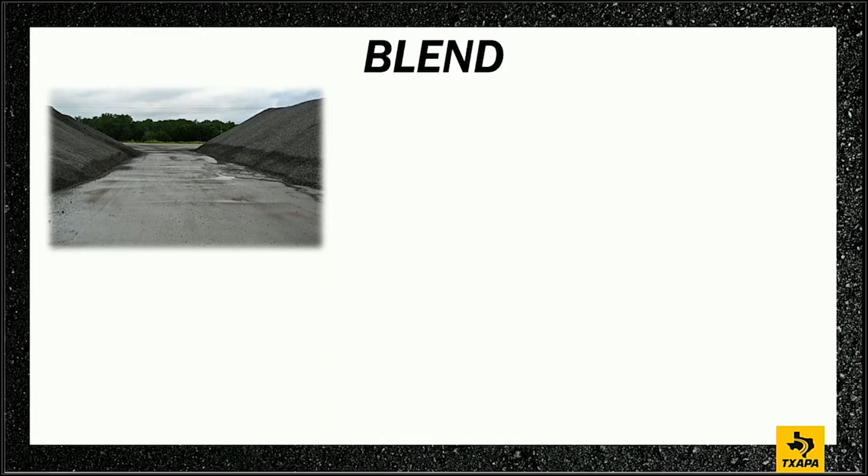So it's super important. When you walk out to the back of an asphalt plant, if our stockpiles are not separated, then we know we have an issue, right? Yeah. We know that we can't control that stockpile. Here we have cold feeds, and I think we have 7 cold feeds here. And again, each one of these materials is going to go into that cold feed, and they're going to go into that cold feed with a loader.

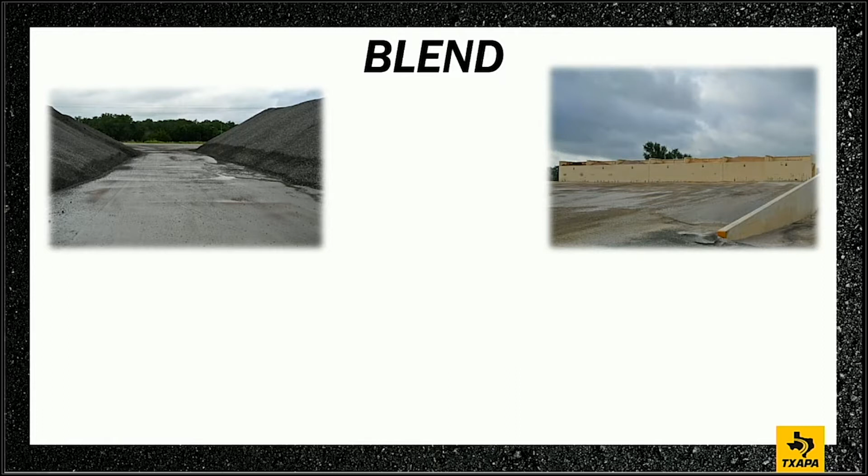So what's the most important part of the asphalt plant? The loader. Because why? The thing I want everybody to look at here is that this happens to be a very, very good loader operator. There's no material spillage in the front of the storage bins or behind them. And he hasn't stacked up the material so far in between the bins where it would commingle and roll off from one side to the other.

If you notice, those bins have bin separators at the top. Those are not to overfill the bins. That's not bin capacity increasers. Those are separators, to keep the material separate. I was real impressed with this loader operator.

I can spend 10 minutes at an asphalt plant and tell you whether or not you're going to have a gradation problem just by watching the loader operator. Yeah, how they cut into the pile, how they work the face, where they pull into the pile. It determines what kind of moisture content we're getting and the consistency. We talk about consistency a lot. We need to mention it at least 38 times, because everything we do in the front end of the asphalt plant is going to create consistency as the material leaves the plant in the truck on a job site.

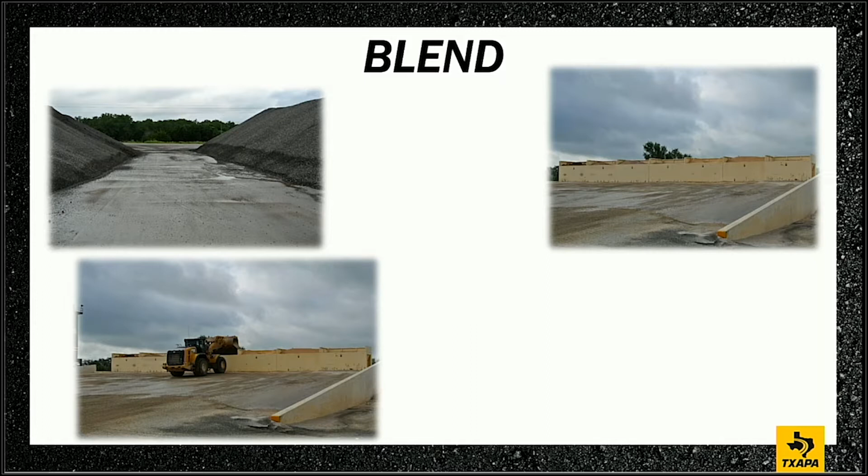So if that loader operator is loading from the backside, the front side, the side of the stockpiles, we know that it's not going to be consistent. We know that we're not going to have consistent moisture. Look at the moisture lines in those stockpiles. It's very visually evident. And with all the rain we got here yesterday, I imagine that line's probably a little bit higher than it is out there right now.

And if it's not on paved stockpile areas, not only do you have moisture, but you're going to have mud, debris, other things. And if that bucket gets down too low and starts picking up some of those wet fines, they can end up going through the plant almost like an aggregate. We were actually looking at a project this week, and we saw some pop outs, and I'm pretty convinced it was due to clay balls and just digging too low.

So the paved stockpiles are nice. It shows good separation. Generally, when those stockpiles are made, they're also sloped. Yep, they're sloped so we can give that water some place to go away from the stockpiles and then drain out. Absolutely.

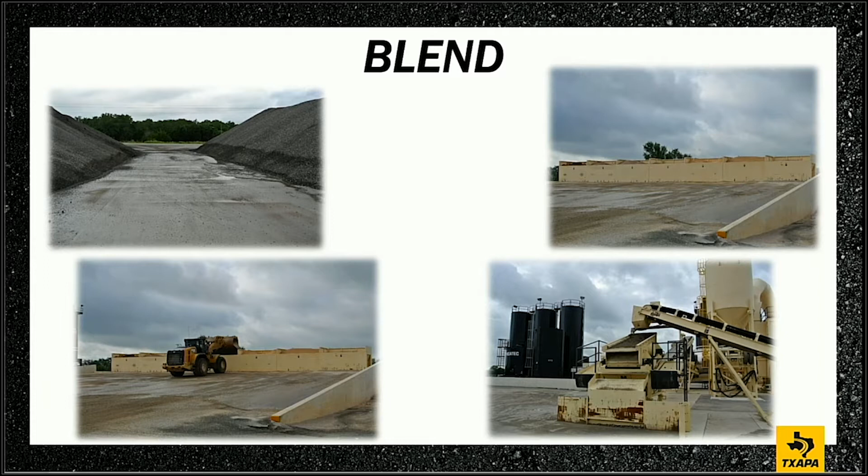Yep. So other aspects of blending. What else do we have? What else can we blend here? We got 2 more bins. We got other products we can bring in. Recycled asphalt pavement, RAP. Yeah, RAP. Or RAS. And RAS. Yep. So that's the reason we have 2 separate bins, and these bins got to be separate because again, they're going to be introduced separately into the mix. Right, and generally they're even shaped different because that material has different flow characteristics. So they're in a different location of the plant.

Well, we also have fractionated RAP. So could that be two different RAP? Could be 2 different sizes of RAP. Give me the lowdown on why do we fractionate RAP? Yeah, so fractionating the RAP is so important. We got to control our stockpile gradations, right? That's the main thing, and that's the whole reason why we have uniform stockpiles. When we look at our RAP stockpiles, we should treat it just like a virgin material. We should treat it as our most expensive virgin material that's out there. Right. Because it is. That's it.

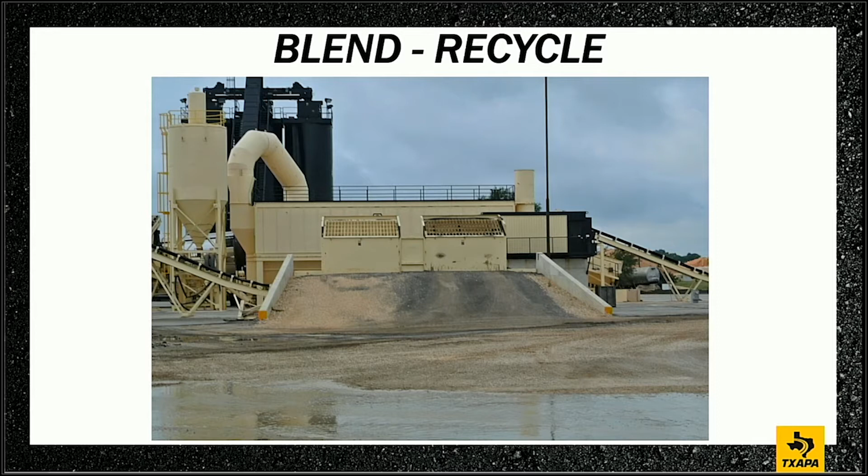You did wear your vest, didn't you? I did, absolutely, right, and hard hat and safety boots.

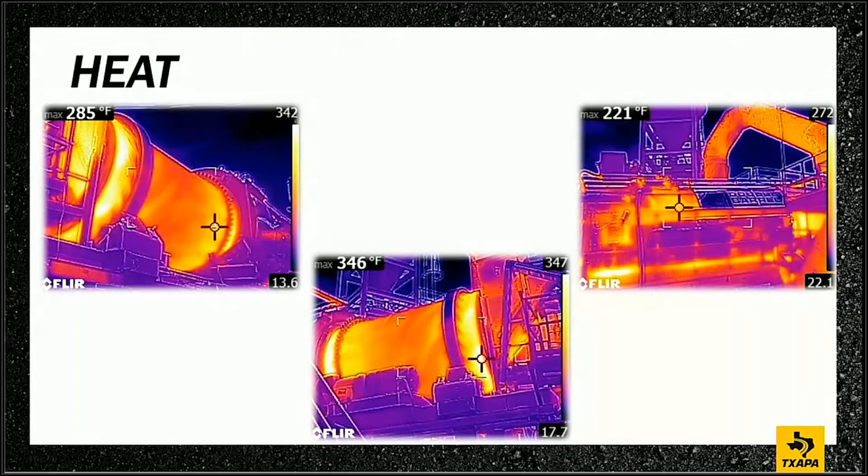All right, awesome. Yeah. But that drum is doing several things. One, it's blending, mixing all those aggregates together. It's drying the aggregate, drying that virgin material. And then it's going to heat it up. And those are actually your two different operations through the process. So we've got to dry that material before we can heat it up. And we talk about consistency, and this is one of those areas that's absolutely critical to understand. Plants are designed or rated around a certain moisture removal content, and when that changes, we need to adjust the plant.

And if they run a moisture content on the aggregate, they can adjust the plant as it's running. But it's been raining here in Buda for a couple of days, and I imagine it's not an average of 5% anymore. No. In these stockpiles. And kind of just a key thing here is that moisture content of the aggregate going into the drum has to be known, because that's how the plant is run. They assume whatever moisture content is, and that is taken out, and we're assuming dry material coming out the back end, and that's what we use to place our asphalt content or binder in.

And if we have our moisture content off, guess what? The binder content's going to be off as well. So absolutely. The only other thing here is that higher moisture content, lower production rate. Again, we just talked about it. It's been raining for 2 days here. Everything's wet. We're going to try to get crews going tomorrow; they haven't worked for 2 days.

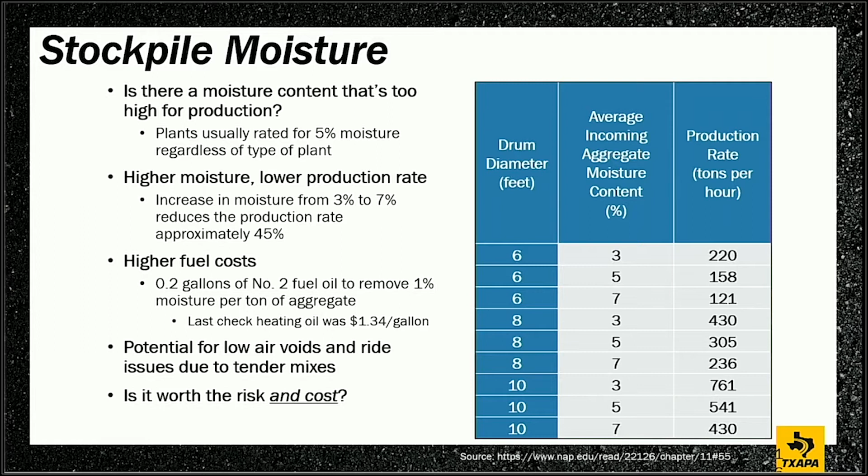Tomorrow they're going to want to go, and there'll be a tendency. Everybody's stacked up. They want to push the plant, but you can't push the plant because you still got to dry the rock. Yep. And so it's actually inverse. So if you try to push the plant too much, we may end up with moisture, and that's not a good thing. And when you have moisture in the mix, and I told Jim this earlier, my guys out in the field would yell, "The mix is tender, the mix is crawling. I can't compact it. We're having trouble."

Right. And most of the time, it has to do with the moisture in the aggregate. We're not getting all the moisture out. We have a tender mix. We can't compact it. So what do we do when we have a tender mix? We try to compact it more. We beat on it some more. And so you're just going to tear it up. And the more you beat on it, the guy says, "Well, let's put a pneumatic roller on. We can knead it up and heal it up."

But guess what we have now? We have a chatter in our mat. Yeah, the ride is not going to ride very well. And I could tell you right now, I could drive across some pavement and feel that chatter, and I know that they had a moisture problem. They didn't get all the moisture out of it. They're fighting air voids. They're fighting density. They're beating on the mat.

And that last line there: is it really worth the risk and the cost to run tomorrow? I know everybody's got to meet a schedule, but realize that you're not going to run 400 tons an hour. Again, for every 3 to 7% moisture, we're reducing our production rate by 45%. I remember talking to one of our members probably a month or so ago, because I wanted to go out to a project. He goes, "Well, I'm not sure if we're going to run or not. Rain last night, and we're going to make the decision this morning whether we run or not."

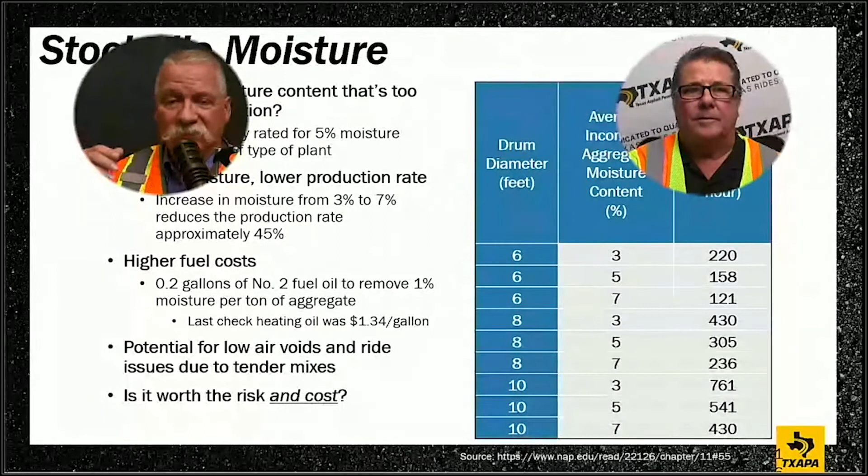I was like, "Really?" He said, "Yeah, we're going to check our moistures, and if the moisture's too high, we're not going to run." I was like, well, good on you. Good on you. Understanding the risk, understanding the cost, making a good decision. So good deal. Absolutely.

So what about additives? That was the next one on our deal. Yeah. We have dry additives here. And if you look on the left, there's a lime silo or mineral silo on the far left-hand side, and it's augering into another section that's bringing in the dry additive from the baghouse. And that baghouse is originally designed to be a big vacuum cleaner to clean out any dust that's going through the process that's caught up in the airstream.

But we reintroduce that material. We can bring that material back into the plant and use it. It's valuable material. Oh, yeah. Most of it's dust or very fine fines. A lot of people think dust is minus 200, but baghouse fines are maybe that and a little bit bigger than that, depending on how the plant's set up and how much air they're pulling through the plant.

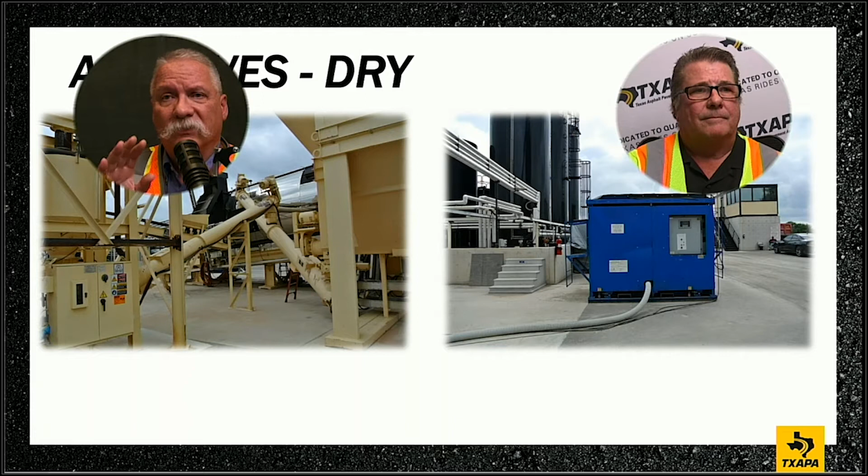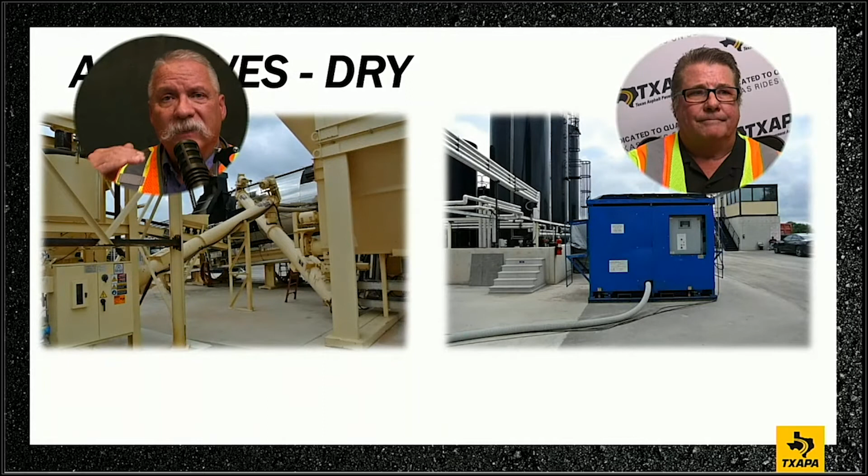But that material, we think, is about a third of the total dust content. Yeah. But if your dust content varies just a little bit, it can make a big change on your volumetrics. So getting that stuff metered back through properly. We talk about plant operation, about again running the consistency. That plant ought to be running consistent. If it's running consistently, it's going to generate a consistent volume of material.

Also type of fines. Yep. And so then when we put that material back into the plant, we're going to have a really good chance of getting a really good mix out of the operation. We had 7 cold feeds originally, and then we had two RAP or recycle feeds. So 9. And where's our 10th one at, Jim? Then we got the mineral filler silo and the baghouse. Now it's 10 and 11. So we got a pile of inputs here.

Yeah. So everybody's got to remember, this is again basic. You got to remember that the baghouse is actually feeding the material into it. I mean, it's actually one of your feeds. Yep. And we have to be aware of that. So when we start having issues with fines, or we're starting to have issues with AC, and we start having this fluctuation, go to the basics. Make sure that we're metering in correctly what we're supposed to be metering in, and that we have consistency.

Right. What else will we have with the baghouse when it's really, really wet outside? We might get caking happening on the baghouse. We might not be getting all the fines back into the asphalt plant. Yep, if we're pushing too hard. Yep. On the right-hand side, we have a fiber machine. This is another input that we have. 12. Yeah. So if you think about this now, fibers, we're not done yet. Yeah, we're not done yet. So that's quite a few moving parts.

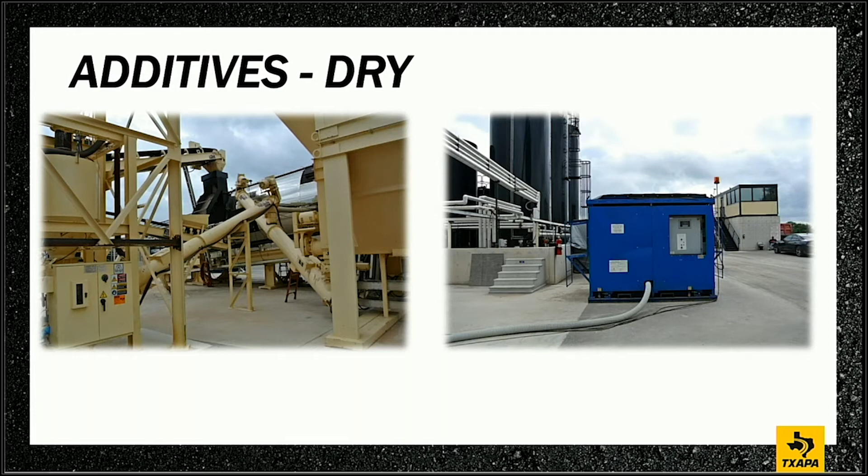But again, if you go back to the basics, your loader operator's doing the basic thing right, and we're metering in right, and we're looking at things right, we're gonna have a good material. But the fibers are not in all mixes. No, SMAs, PFCs, thin bonded. Yep. And what they do is they help hold additional binder into the mix to help make the mix last longer. We're not using it for any strength parameters. It's basically just trying to hold a thicker film of asphalt around the aggregate and in the mixture itself.

So a valuable tool. I like fibers. A lot of people don't like them. They can be a pain if they get wet and that kind of stuff, but they certainly do a good job. Yeah. So now we have liquid additives. Okay. So we had our dry additives. 12. Now we're okay. Keep going. So a lot of people are using chemical warm mix. We got a chemical warm mix as a liquid additive, and again, that's got to be metered in correctly.

Right. And then on the right-hand side, what are those 3 big old tanks we have there, Jim? Those are our liquid asphalt storage tanks. Yeah. So that's an additive, guys. That's an additive, and a lot of the times we don't pay enough attention to all the things going into the asphalt plant or going into the asphalt. And the liquid additives, the AC is very, very important.

We got to maintain our consistent temperature in those tanks. We need to maintain consistent temperature through our whole system, so that we get the right viscosity, we get the right flow, and then our metering system is correct. All that's got to go hand in hand. And even though it's number 13, that is our lucky number, because we really need to rely on that binder. And those vertical tanks actually have an impeller or a propeller in there to actually help mix and turn that material and keep it moving.

And they're heated, and each one would hold a different product, unless the contractor's running a lot of material and he needs to double up on a plant. So we want to make sure we're using the right material. We didn't show it in this because we just don't have time today, but generally, we're going to be pulling liquid samples during production to test and make sure that they meet all the properties. Absolutely.

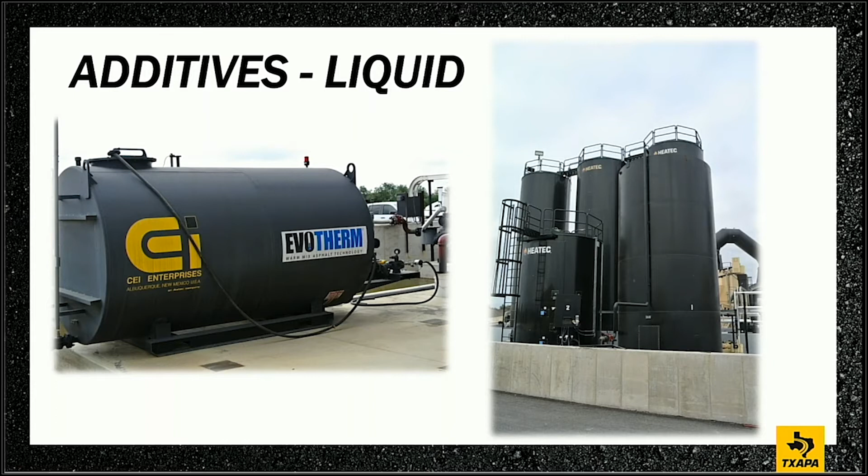So if you're an inspector at the plant, you might be looking at that, and there'll be a sample port or a sample device in there to actually make sure we get those samples out and then get them taken care of, get them off to get tested.

So, all right, so we're moving on. Yeah, we got 13 inputs. 13 inputs are all going into a mixing unit. Yep. And Jim, I like this mixing unit that you have set up here. It's a good graphic. Yeah, you got the aggregate, like you said, coming in from the left-hand side and flowing through. We have our flights that are there to create a veil, and that's to help that material become dry. It's helped the moisture become dry.

Those are shaped specifically to lift the material up and drop it down across the face or the diameter of the drum into that airstream. So you got aggregate coming in this way, and your gas stream or your dryer or your hair dryer is blowing back the other way. So you have a counter flow drum, which is the most popular type drum out there. And this is one manufacturer's version.

There's other versions that have the mixing drum on the outside. Got the double drums. You're drying the aggregate at the beginning. You're heating it up through the middle. And then once it hits where that flame is in the middle, those flights are different. They will actually hold the aggregate to the side of the drum to allow it to pass through and still get conductive heat transfer to continue to warm it up.

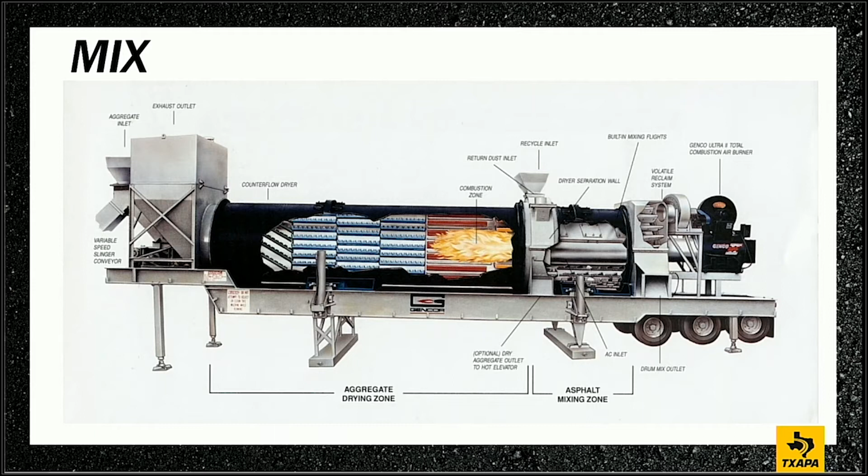And then right about here is where your recycle would come in on this drum behind the flame. Yep. And then you get into your mixing drum back here. And so what's added here in the mixing area? So all the additives. So we got all our additives getting in that mixing zone. And we got our mineral filler, our baghouse fines, our binder, anything else, our fiber, warm mix. All that stuff would be coming in right in this area. And then once it gets to the end, it's hot mix. It's hot mix. Yeah, there we go.

So that dwell time can vary depending on how long that drum is. And it also can vary with the flight. So you can change those flights up to do different types of mixes. High RAP mixes are going to require different flighting than you will with low RAP mixes, and it's real important to know. Again, it's something that goes back to basics, is that you need to be flighted correctly for where you're working at, your zone that you're working in, and what we're trying to accomplish.

But in general, contractors aren't swapping flights every week. For their particular mixes that they're going to run in a particular area, they're going to optimize their plant. They're going to set it up a certain way. May take them a couple tries, but then they will settle in on a certain drum configuration, and that's going to have to work for the different products that they're going to make in those areas. That's correct.

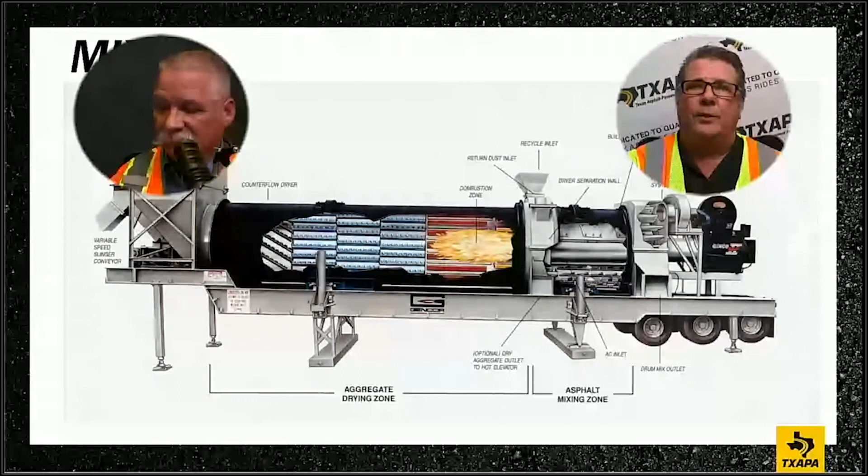But they're fascinating devices. Really, if anybody hasn't been out to an asphalt plant, this is definitely something that you go out there and take a look at. And now that we're giving you the basics on what to look for, our aggregates and our blends coming in, that's the mixing area.

Does it just fall straight into a silo? Oh, absolutely not. So it goes up a slat conveyor, like Jim said, and then when it gets up there to the top, we have a transverse conveyor, and that transverse conveyor determines what silo that material is going to go into, right?

So it's going to move that material from one silo or the other, and from that area, it drops into a batcher. A batcher is the next thing it drops into, and these batchers are anywhere between 2 and 4 tons. What happens with the batcher is that it holds that material so it doesn't just trickle into the silo. It's going to collect that material like a big bushel basket, a certain amount of material, and then dump it all at once into the silo. After 2 to 4 tons, depending on the size of the batcher and your batching, it's going to dump it into the silo in one full unit so you're not just dribbling in.

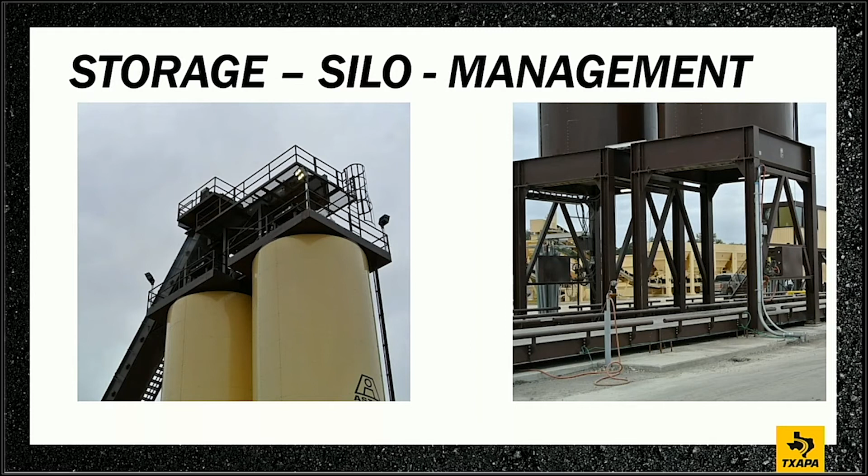I think we'll see that a couple of slides from now. I think it's pretty cool; somebody really thought this through. And that's why we call it management, because you've got to manage your material. Yeah, we don't want to do any harm to the material once we've made it. We want to keep it consistent from the drum all the way up into the silo, store it properly, store it consistently, drop it into the truck consistently. We'll talk about paving another day, but a key element here is silo management. The whole science and art of silo management, trying to feed multiple crews with different mixes when everybody wants mix at the same time, can be a real challenge.

That's why you'll see an asphalt plant start up really early in the morning to fill up their silos, so at 7 and 8 o'clock when everybody's lining up at the gate ready to go, they can load out as quickly as they can, and they'll continually make mix. Depending on what they're doing that day, that serves as a buffer, a surge, if you will, of material, and allows them to keep up and get caught back up again.

I love this little picture, and what I was trying to show is that all these silos are insulated. A good insulated silo, you're only talking about 92 to 100 degrees on the outside with 300-degree product on the inside. That's pretty good insulation. The main thing is that's what they're designed for: to store your material so you can manage your production and your life out in the field. Like Jen said, you could jug these silos up early in the morning, make mix and load out mix at different times, and be successful out in the field.

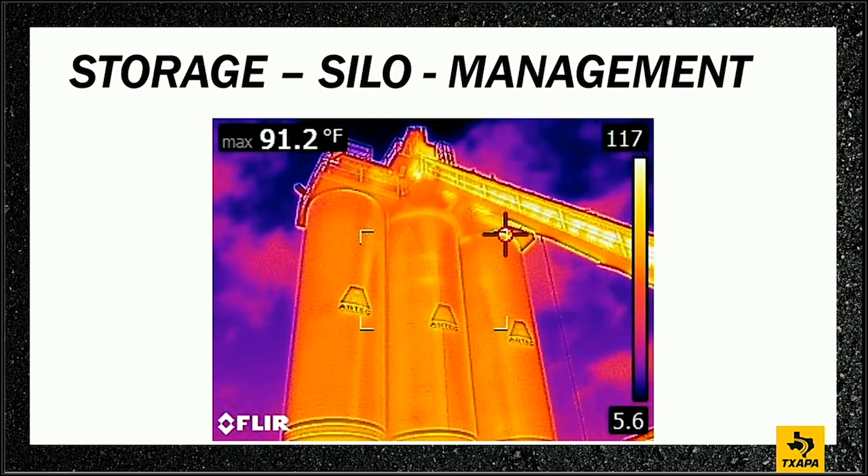Yeah, that infrared gun that you got really is very helpful around an asphalt plant when you're troubleshooting and looking at different things. You can see the consistency from silo to silo to silo there. That uniform color, and then you can also see the hotter material coming up the slat conveyor. Yeah, I like that. Going to the top and then it'll be discharged in. So those infrared guns are really valuable at an asphalt plant.

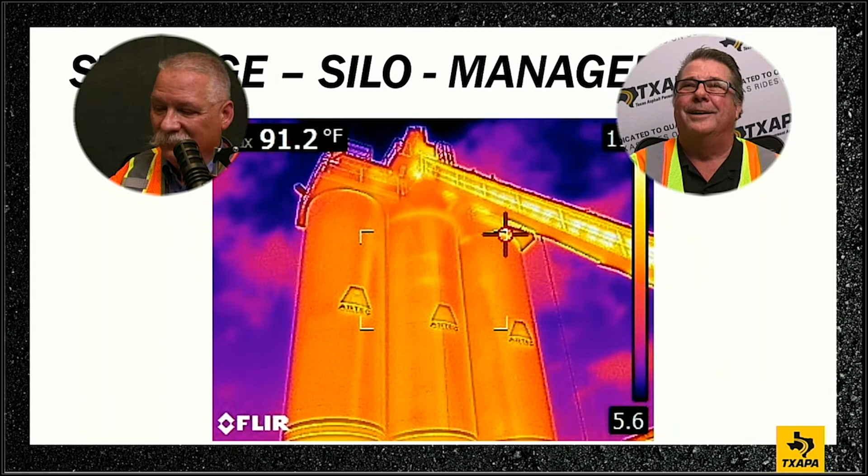Absolutely. One of the things that our guys did is use that infrared gun and shoot the bearings. Shoot all your bearings, and you can see a bearing going up pretty quick with that gun. Every asphalt plant should have one, to tell you the truth. Your ground guy should have one. You don't want to be fixing a bearing at 8 o'clock in the morning when you're trying to make asphalt. They cry before they die, generally. There we go.

All right. So loading. So Jim, this is actually a video. I don't know if you could play the video or not. So if you would play the video, I just wanted to show everybody that, again, you got the trucks in between the legs there, and as the video, whoops.

Dang, that was the best part of this whole presentation. Down to the left-hand side, it didn't pop up to where you can play the video. Wow. Oh man, must be Jenna's fault. Tune in next time. We're gonna blame Jenna on that.

All right, so I'm just gonna explain this like the video's going on. So it's a clamshell drop that happens from the silo, and what that clamshell does is it opens up, and the material is falling at a pretty good rate of speed. Yeah, generally about a ton a second. It's going to come out and fill up and make the first drop in that truck. Correct. And then what's the truck going to do?

That truck's going to move forward. Right. And then we're going to load another drop. Yep. A lot of times at the back, against the tailgate. So we've got consistent material all the way through the truck. And why do we do multiple drops? We want to minimize segregation, and we want to improve consistency.

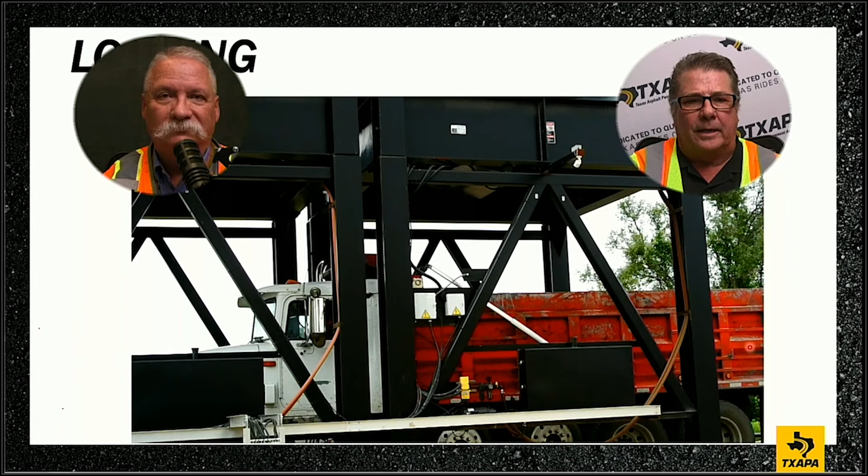Consistency. Yeah, absolutely. Again, when I start going out into the field, or my guys are complaining out in the field that we have segregation, or we have temperature issues, I'm going back and looking at the bare basics. Are we doing a minimum of 2 drops? Most of the time in those trailers, we're doing 3. Are we doing a minimum of 2 drops in these quad axles, or these centipedes that they call them now? Are my guys paying attention to that?

And you can see there that he actually has a tarp system. Do I have a good tarp on it, or do I have a mosquito net tarp? If it's 300 degrees and it's 100 degrees outside, and I'm in Laredo, Texas, maybe I don't need that all-weather canvas tarp. But if I'm fighting temperature issues, I'm fighting density, and I'm hauling 100 miles, and the wind's blowing, you got to take a look at the tarps. Big fan of tarps. And again, it all boils down to consistency.

If my guy out in the field cannot consistently achieve his density, I've got to look at why. So I'm going to go backwards, to the asphalt plant. If I have segregation issues, I'm going to go back to the asphalt plant. Maybe my gob hopper's not opening correctly. Maybe my loader operator is not paying attention and he loaded the wrong cold feed, or it's contaminated, or we're having issues with material coming in.

A lot of these asphalt plants have a little footprint. In other words, they can't store thousands and thousands of tons of material. They're bringing material in as we're sending material out. So you got to have a QC guy there all the time doing what?

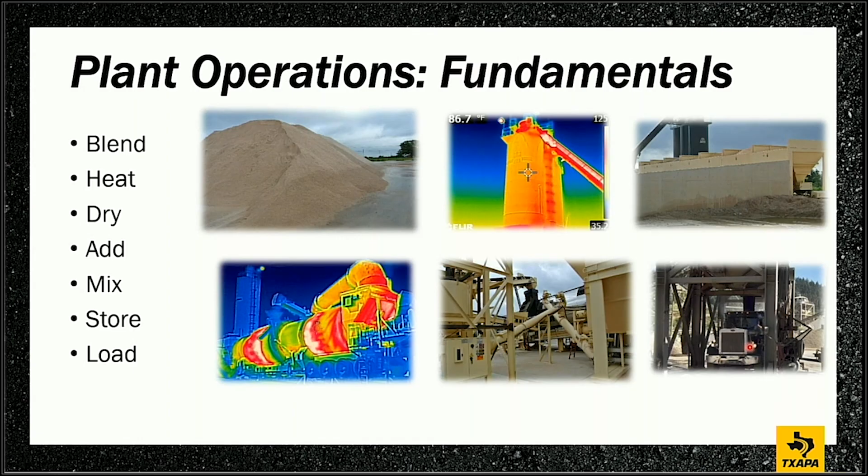Hey, that's basics. And again, go to the basics. You don't have to reinvent anything, or you don't have to be a PhD or geologist. You can go back there and look behind the asphalt plant. If that loader operator is running uniformly, he's loading from the front of the stockpile. You're bringing in material to the back. They're sloped. You know that they're consistent. That loader operator is not overfilling the bins. We don't have cross contamination. You're going to have a better shot at getting a bonus on your production than any other time.

And again, a 1A, his responsibility is not just to sit in that lab, it's to go out there behind that asphalt plant and look at those stockpiles, look at that RAP stockpile, take gradations of that RAP stock, take AC contents of that RAP stockpile. You 1As at the asphalt plant, you got more responsibilities than just sitting in there. You need to be behind the asphalt plant and really taking a look at it.